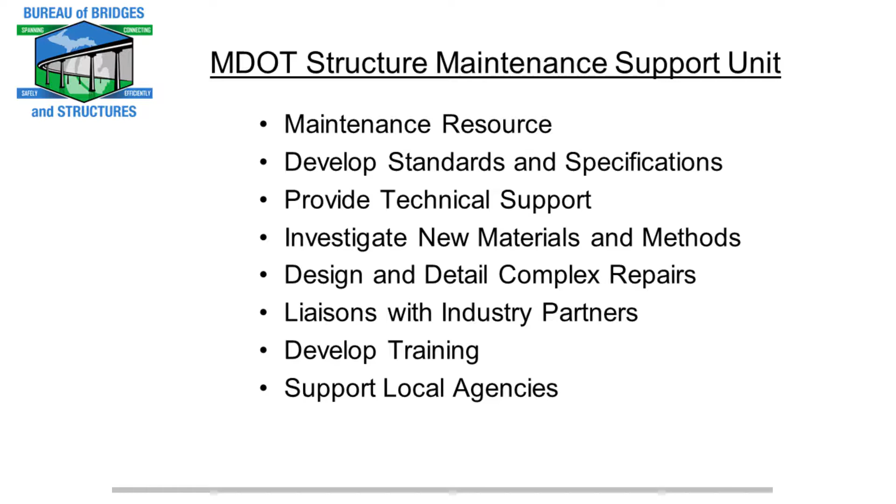The MDOT Structure Maintenance Support Unit that I'm the manager of is the maintenance resource for the entire state, whether you're a regional partner in Michigan DOT or a local agency, county, city, village, anyone. We help develop standards and specifications for bridge preservation projects, provide technical support, investigate new materials and methods for bridge preservation, and design and detail complex maintenance repairs. We're also the liaison for the state for all our industry partners for bridge preservation, and we develop training modules for the state and support local agencies with training as well.

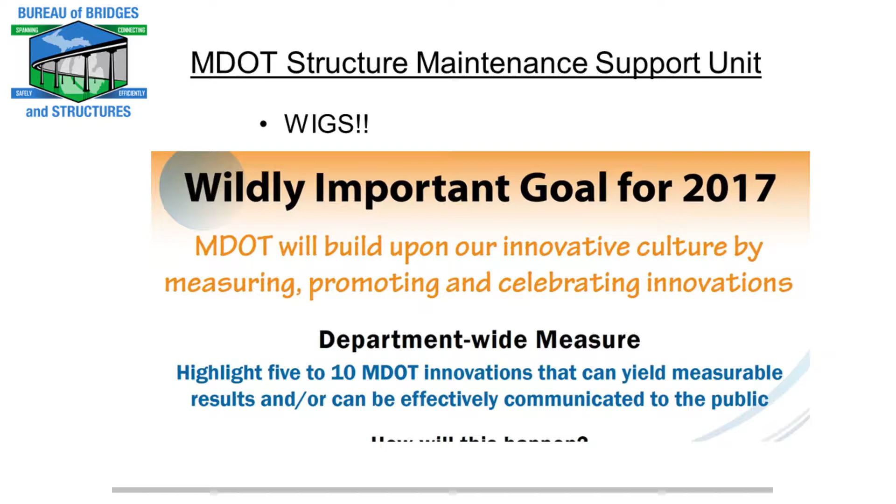We have what's called wildly important goals in Michigan. As an overall state, our wildly important goal was for innovation, but my specific area's wildly important goal for the last 2 years has been to focus more on local agency outreach and help get them up to speed on bridge preservation methods. So we partner with local agencies and we train local agencies.

We also do employee swaps. In the summertime, a local agency in some areas of Michigan can send their workers to work on our bridge crews, and we pay their salary for the summer. Then in the winter, we send some of our bridge crews to their garage to help them plow snow. So that's how we go back and forth. That brings actual hands-on field experience in a very easy way back to the local agencies.

A lot of their challenges is they just see bridge preservation as being something too scary for them to do. They don't even want to touch it, so I try to get out in the field as much as I can with them to explain the simple things they can do to extend the life of their bridges.

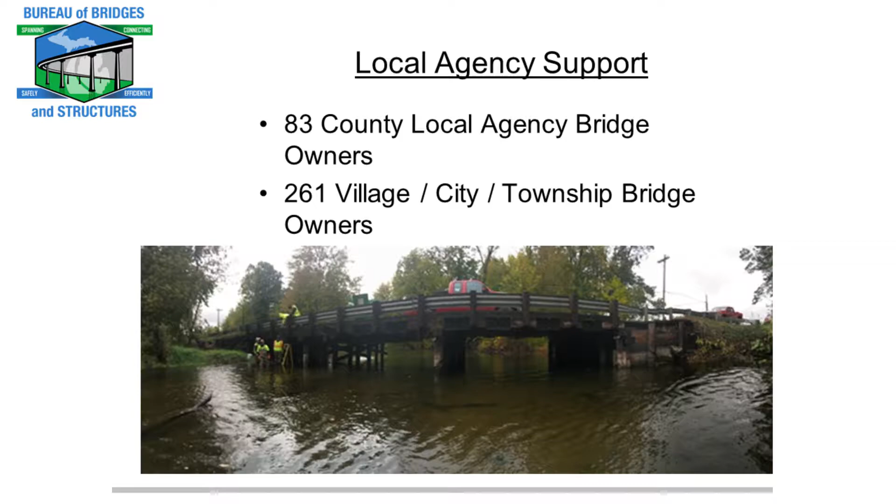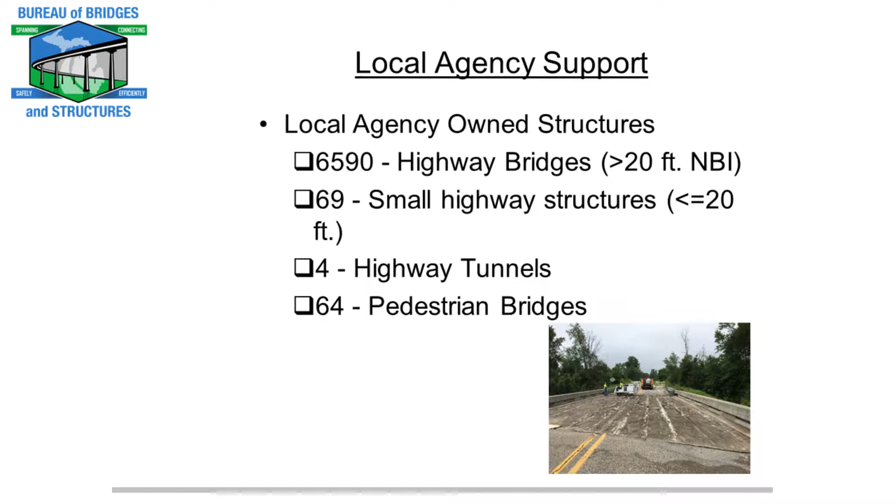Michigan has 83 county local agency bridge owners, and 261 different bridge owners that are village, city, or township local agency owned structures. There's 6,600 highway bridges. Our Constitution says we have to call it a bridge if it goes all the way down to 10 feet, so local agencies have another 69 that are less than 20. They also have highway tunnels and 64 pedestrian bridges.

In Michigan, our Constitution says we have to inspect anything over or carrying road traffic, so pedestrian bridges, railroad bridges, everything has to be inspected by the state or local agencies. Just in comparison, the state of Michigan, MDOT itself, only owns about 6,000 bridges, so we have less than the local agencies.

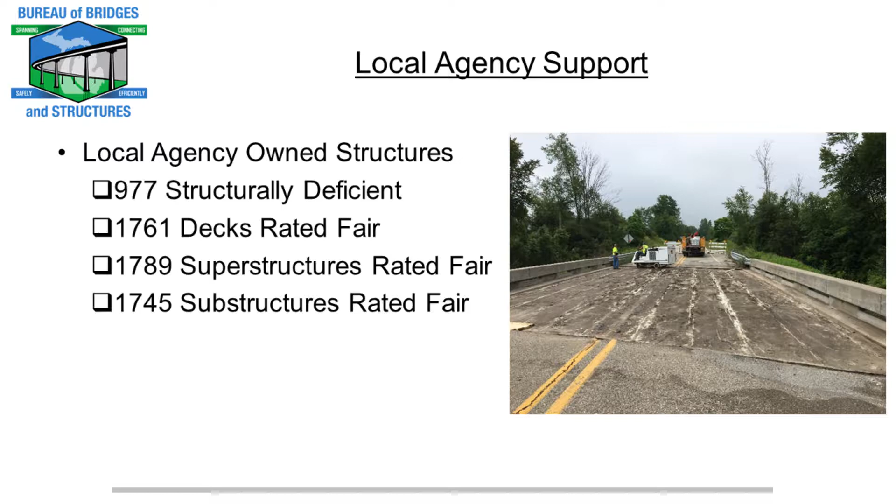Local agency owned structures have 977 that are structurally deficient, and nearly 2,000 with decks rated fair, superstructures rated fair, or substructures rated fair. I want to teach them how to focus on those fair rated bridges to make sure they're not falling into that structurally deficient category.

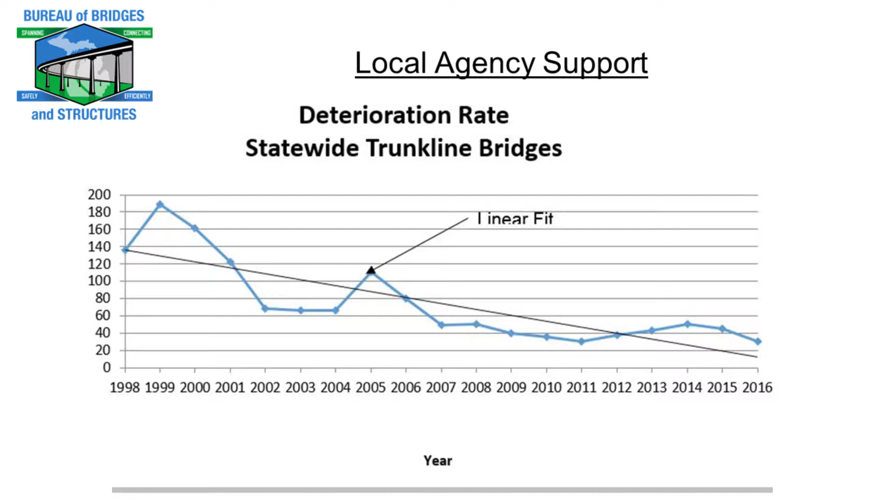Michigan started doing this strategy in 1998. This graph shows that in 1998, Michigan had 140 bridges for the first time fall into the structurally deficient category from either good or fair. We've been able to reduce that trend of how many new bridges fall into our structurally deficient inventory every year since then, down to this graph which goes to 2016, where we had only about 30 bridges fall into the structurally deficient category. That's just from having a very solid bridge preservation strategy.

Prior to 1998, we were a worst first state and didn't do much for maintenance. Every year, as part of this goal, our regional bridge engineers have to explain to upper management how they are going to keep every bridge rated a 5 from falling into the structurally deficient category as one of their focuses.

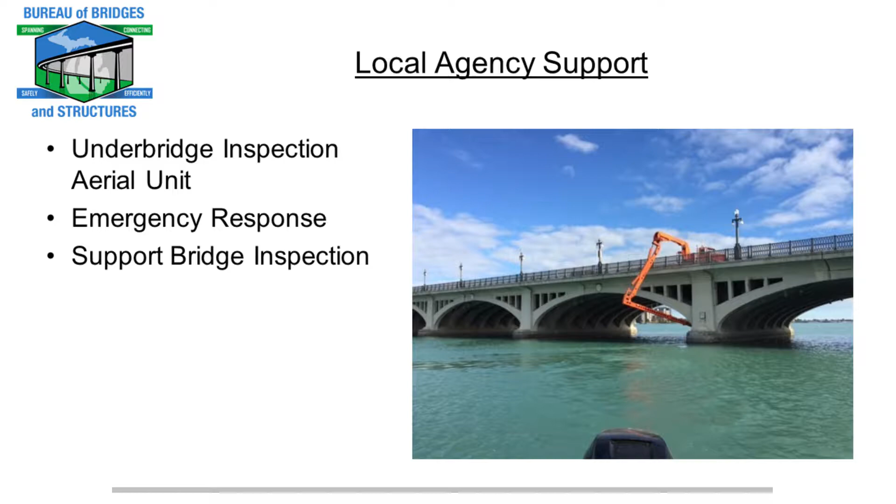We also support our local agencies. We let their inspectors go on our under-bridge inspection unit, we'll help them with emergency response if they have a problem, and we'll support them in bridge inspection. And we don't charge them anything for that.

For local agency training, last year our LTAP put on an annual conference for local agencies to come to, and the topic for 2 days was nothing but bridge inspection, bridge construction, and bridge case studies. Last year they asked me to come in for day one and do 8 hours of presentations on bridge maintenance.

So I got in a room full of probably 250 local agency members, and was able to give them a full day's training on simple things they can do to maintain their bridges, how to do joints, how to clean joints, the benefits of just getting the dirt off your bridge and your bearings, and the benefits of simple preservation activities that if we went out to our local agency bridges, we actually wouldn't see them doing. A lot of them, their sidewalks are covered in dirt and just sit there wet, and the chlorides sit there on the sidewalks all year, and they start to deteriorate, and they don't even realize what that's doing to their bridges.

We'll also help local agencies with scoping. We had a Missaukee County Road Commissioner give me a call. He was in a panic because his consultant inspector lowered his deck rating on one of his bridges from a 6 to a 4, and he thought it was a pretty good bridge. So he was in a panic as to why this was going on and what he could do to make sure it didn't stay structurally deficient, because he really had no idea.

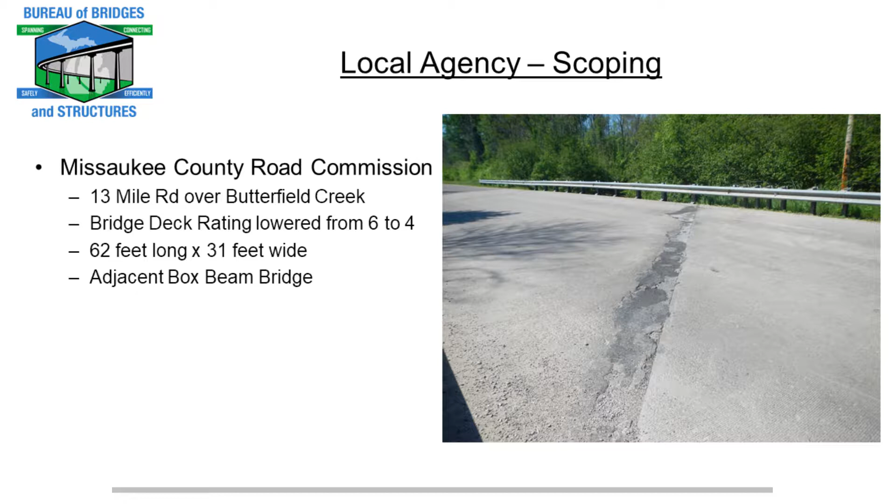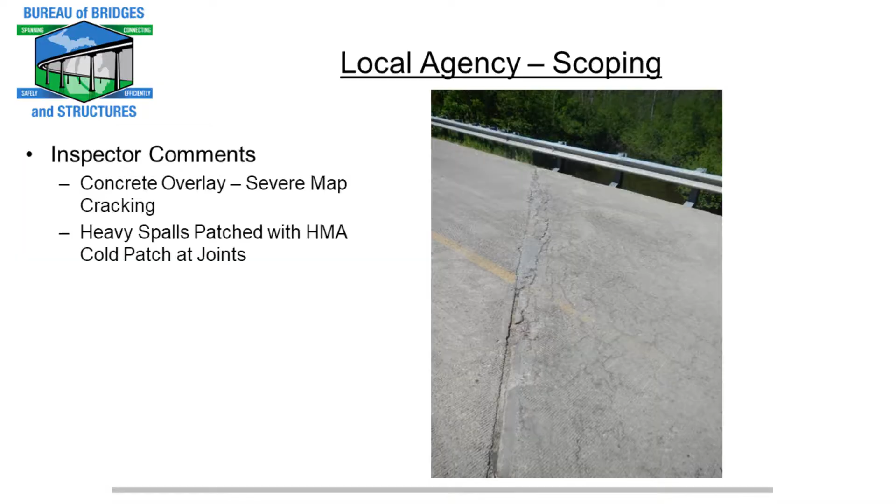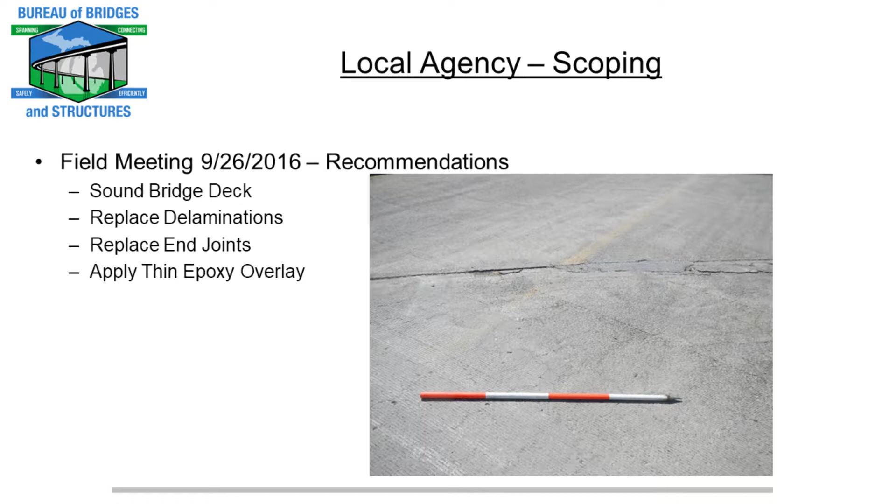So we met him out in the field. It was an adjacent box beam bridge, and the inspector's comments said it had severe map cracking and heavy spalls at both joints. But the bridge was so small that that percentage of the deck warranted probably a 4. So we actually hooked him up with one of our regional bridge crews to help him replace the joints and put a thin epoxy overlay on that bridge deck, and showed him how simple it actually is to repair something like this. That bridge is no longer on their structurally deficient list.

And when I say these people have no idea what they're doing, there's a lot of local agency bridge owners out there - maybe I came across bad. Here's a funny story. Our head inspection engineer for the state actually had to call a local agency. She was an elementary school teacher. Had to pull her out of a classroom and tell her she had a bridge inspection that was late, and she didn't even know she had a bridge. So sometimes that can be your local agency bridge owner. Some of these people really do get into a panic and think bridges are scary.

We also help out with a lot of product trials. This is where I'm going to talk about UHPC a little bit. MDOT's had a lot of challenges with UHPC. The first trial project we tried to do, we specified Lafarge, and the general contractor submitted a value engineering change proposal that completely got rid of the UHPC because it was so expensive, and MDOT actually accepted it even though we wanted to try it. I'm not too familiar with why we accepted the value engineering change proposal. So our first trial project in Michigan for UHPC, we actually didn't use it.

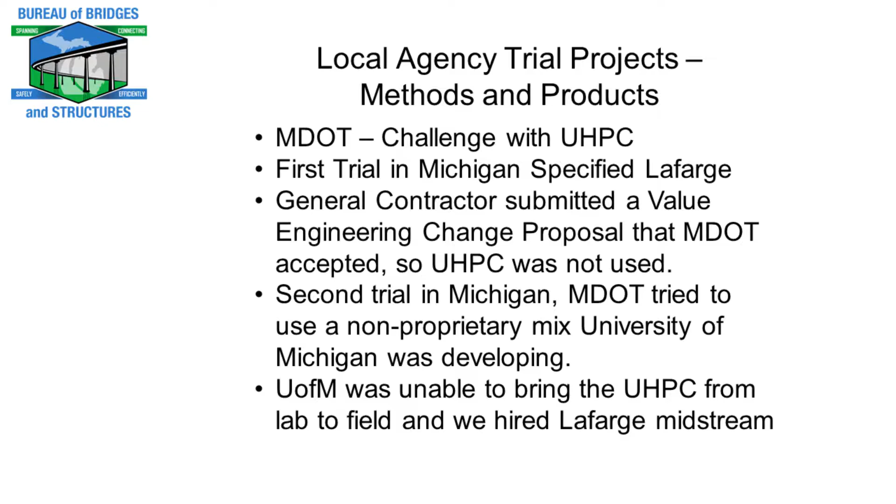We didn't use it until our second trial. We tried to use a non-proprietary mix developed by the University of Michigan for research, but at the time of the project, they were unable to get their laboratory batch size upscaled to a practical field batch size. So midstream in the project, we actually hired Lafarge to come out and do the UHPC for us. But within another year, U of M had actually perfected their batching, their sequencing, and their UHPC mix design. This is where we landed on our UHPC mix design, and this one we were able to actually get into a large enough quantity to batch in the field.

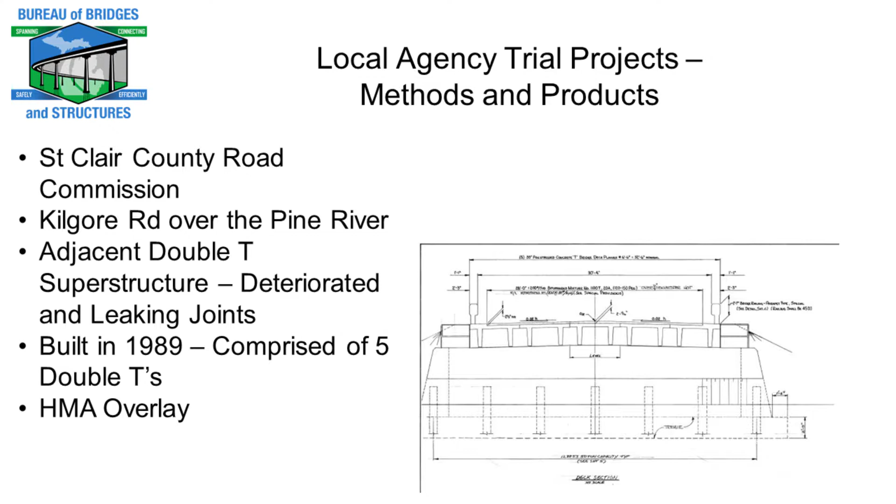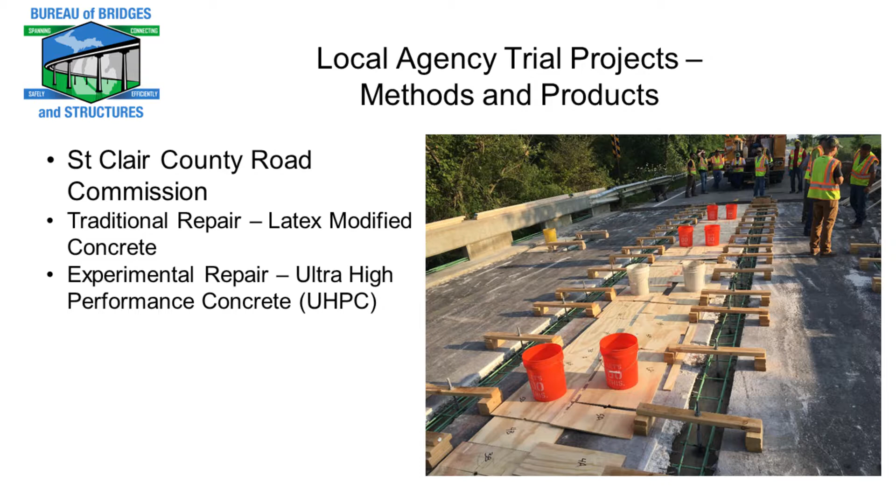A little bit after U of M was able to come up with that UHPC mix design, the St. Clair County Road Commissioner gave us a call and said they had a bridge with an adjacent double T's superstructure where the joints between the double T's had completely deteriorated and leaked, because all they'd ever had on it was an HMA overlay with no membrane. It was built in 1989, and they asked us what we could do to fix this - could we give them a hand? In Michigan, a traditional fix for that would be a latex modified concrete, but we thought this would be a great opportunity to try the mix that U of M had developed and said they could get to batch in the field. So we went forward with using U of M's ultra-high performance concrete mix design for this project.

We also took advantage of the fact that these were all non-proprietary materials that could easily be bought on the open market. We used this situation so that when we were done with U of M's first mix design, they wanted to actually field batch trial several other mix designs.

So now we have more than one that we can evaluate. This is just another picture of the bridge. It's a typical DOT experiment though - there's actually more DOT employees there than can fit on the bridge.

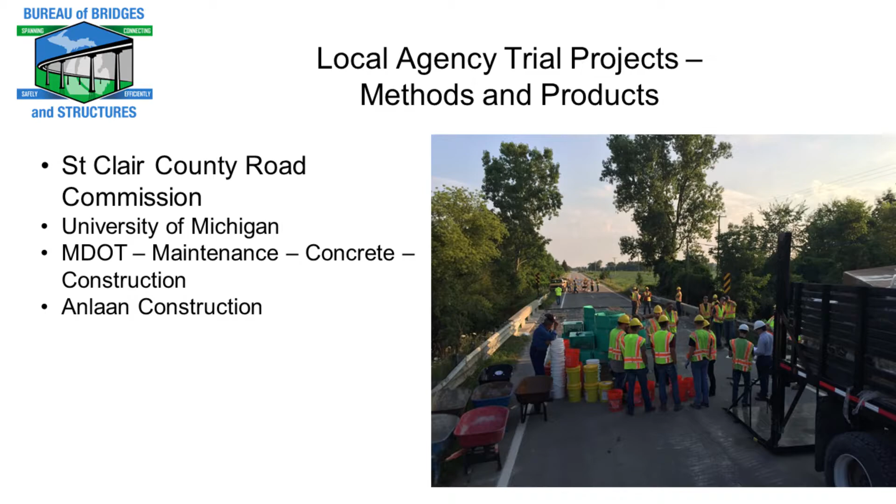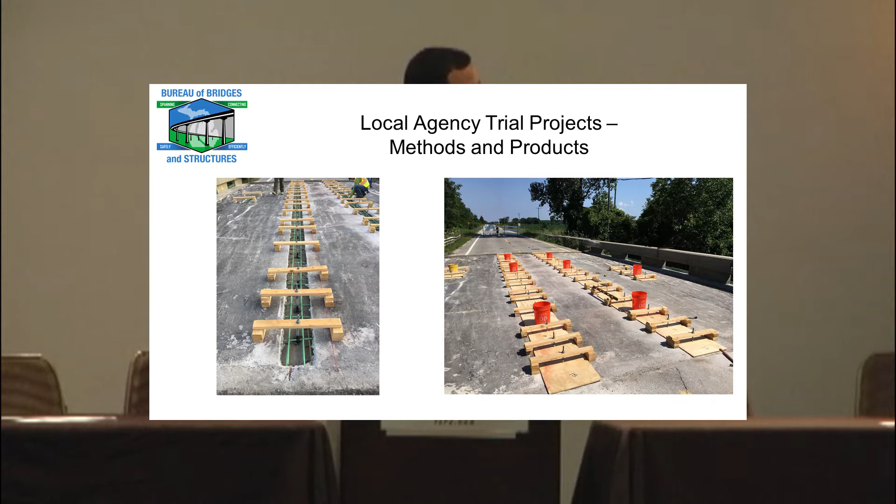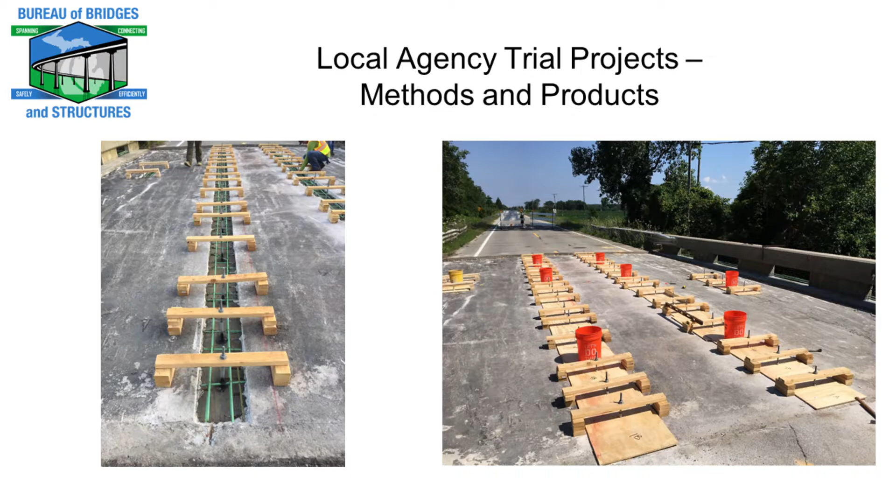For this UHPC trial, UofM wanted us to do a full depth pour. These bolts here are supporting the forms underneath the T-beams. Over here, these are clamped down to the ground and to the deck. These will be clamped down to the deck after the UHPC is poured, and then we filled these buckets with UHPC to give a bit of a pressure head and try to squeeze it into as many of the crevices as we could.

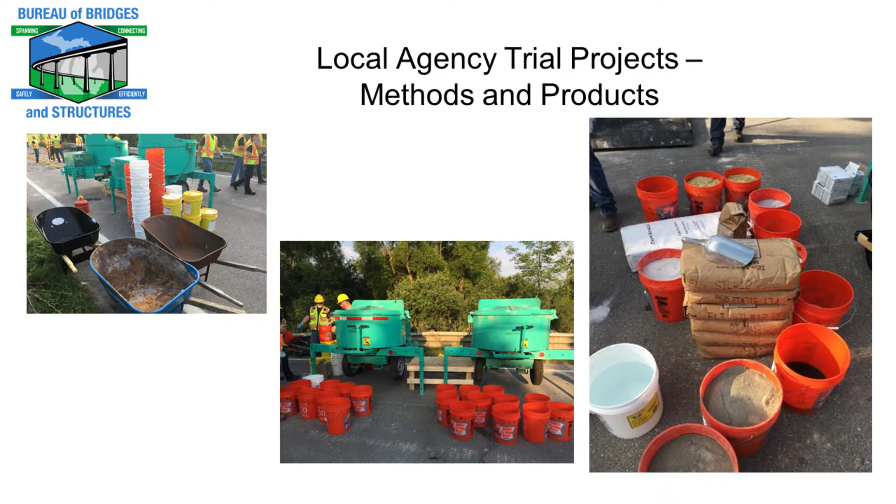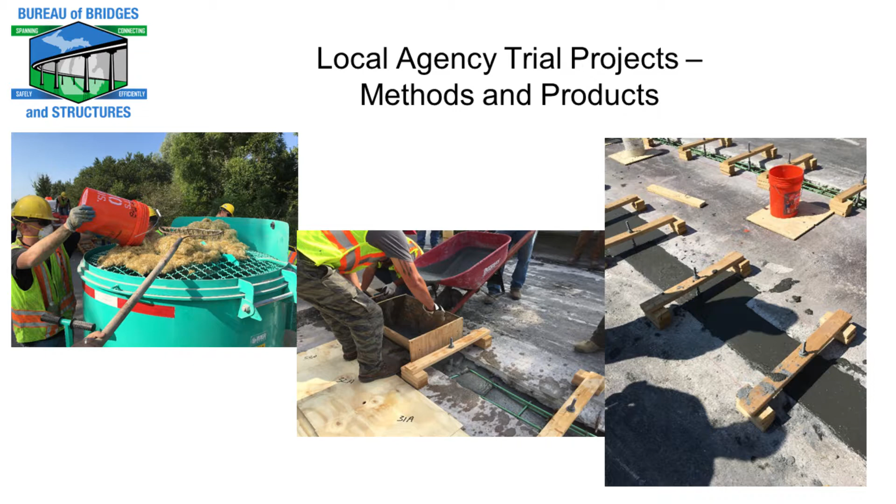You can see here it took an army of co-ops, buckets, wheelbarrows, and measuring devices. It felt like a big chemistry project out there, and the co-ops were loving it because it's just like the labs they have in college. Here we are just dumping in and batching things. The St. Clair County Road Commission built this little bucket to help transfer the concrete from the wheelbarrow into the slot without spilling too much.

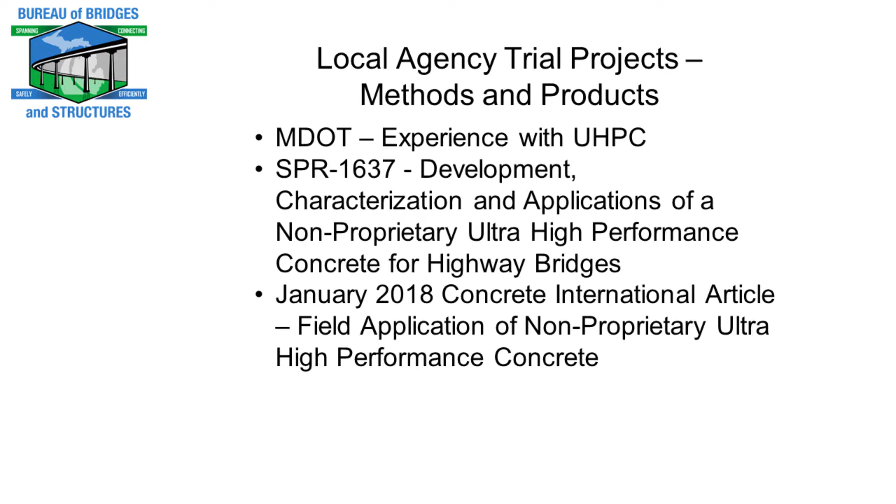So our experience with UHPC - the whole project went really well. I didn't get real technical in this presentation, but you can read all about the UHPC mix design UofM came up with on our website. It's SPR 1637, and if you want to Google it, the whole entire project we did with St. Clair County is in the January 2018 Concrete International magazine. UofM wrote an article for that.

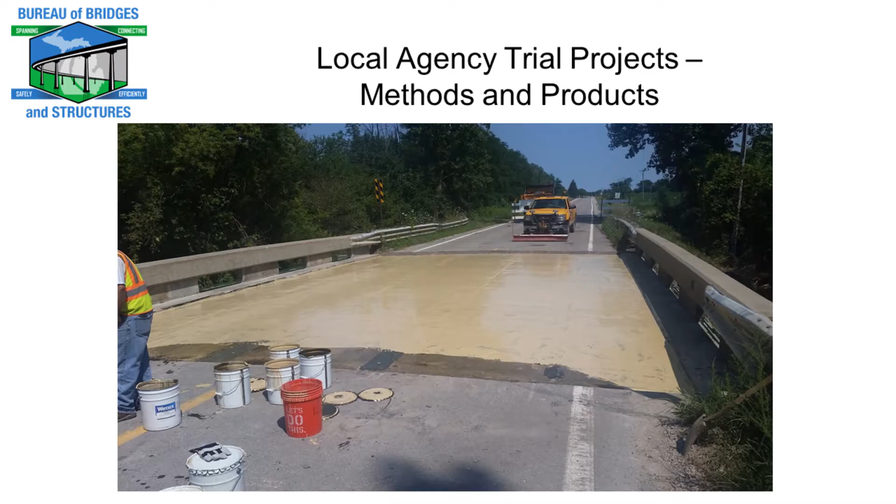As I said before, we also do lots of trial projects for these local agencies. Not to let a good opportunity go to waste, we decided at this same bridge we did the UHPC on, before they put back an HMA overlay, we wanted to trial a spray applied membrane. So we rolled two actual trial projects into this one project.

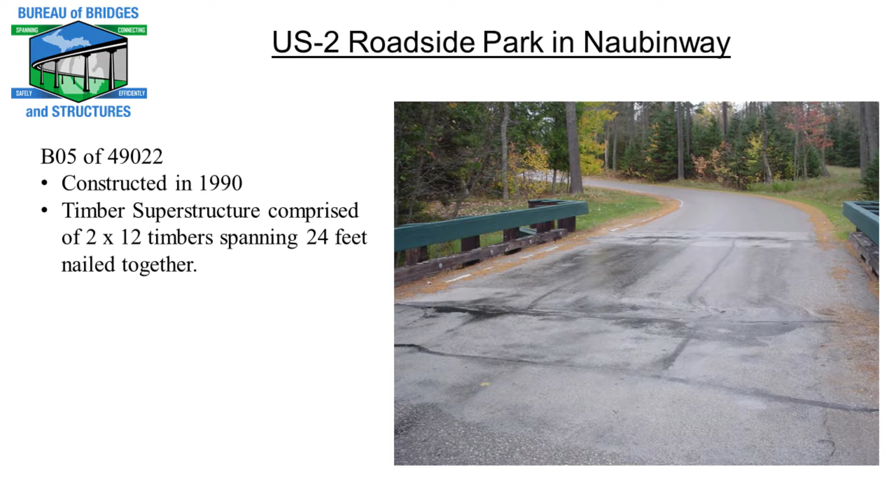But this is what they start to look like after a couple of years. The wood and moisture expanding and contracting backs out all the nails, and these bridges start to grow. In 2011, one of our inspectors was out inspecting the bridge. A truck drove over it, and he had an 'oh my God' moment as he saw how much the bridge deflected. He decided to do a load test on it, and this is when we discovered it was actually deflecting quite a bit.

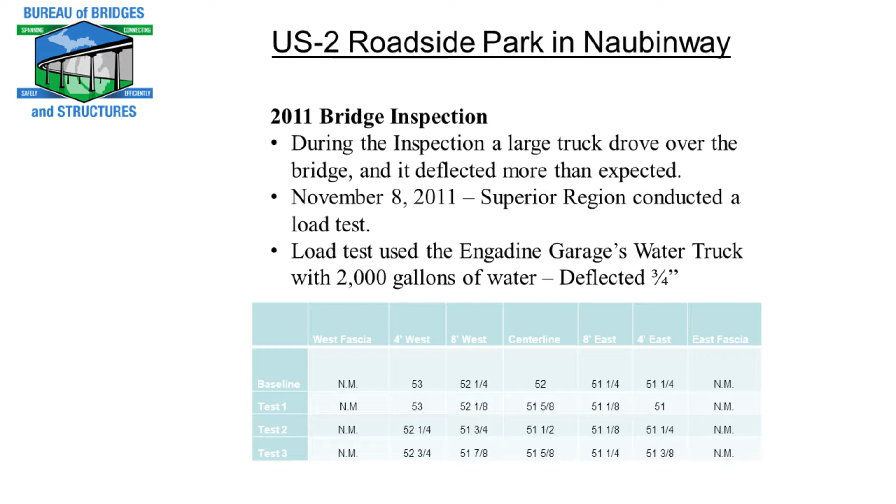It's only a 20-foot span, I believe, or 24-foot span, and it deflected 3/4 of an inch. That was just with a 2,000-gallon water truck sitting on it. And this bridge is going to be seeing lots of logging trucks in the UP, completely loaded as high as they can stack it.

So how do you fix this? I'm not going to tell you - that's my next presentation today. It was just my teaser.

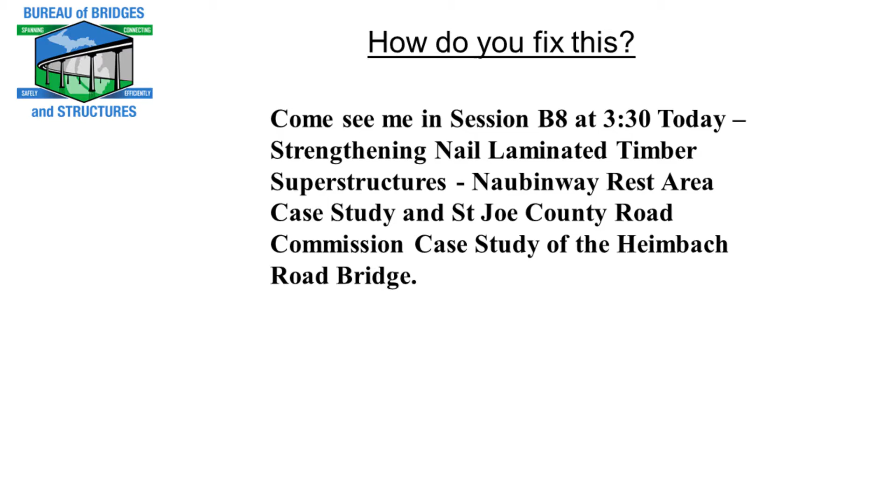Michigan only has one nail laminated timber superstructure that MDOT owns, but our local agencies have hundreds of these. So at our LTAP conference, I gave a presentation on this, and at the next presentation I give, you'll see how we fix this and how, since that LTAP conference, local agencies have been engaging me to fix their bridges with similar problems. They have hundreds of these in their inventory because they're real cheap and real small.

Quite impressive that you guys do so much work directly with the locals - in fact, you even have your employees work with them.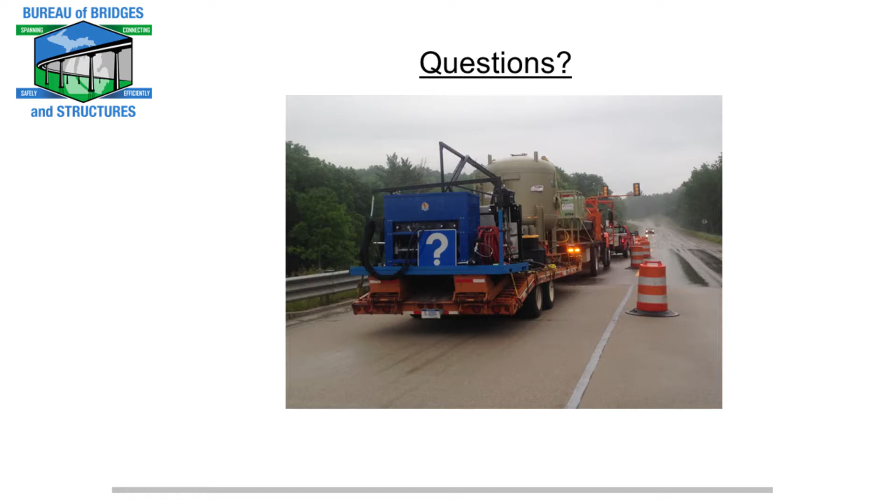In Oregon, we've done some of that, but it's only when they can do overtime kind of a thing, and then they'll go do a small project. Did you guys actually go to the legislature and get some additional positions with the promise that you'd do more support to local agencies? No, the legislature doesn't even know that I do this.

This is being recorded, I know. Well, they're not going to watch it, so we don't worry about it.

On your state inventory, are you guys caught up enough so you don't have a real challenge pulling them off of state projects to help? Our state has 7 regions, each with probably 1 to 2 bridge crews, and they're only 4-person crews, sometimes 5-person crews. So they can't do a lot, but we do try to help local agencies when we can. We're not doing it a lot.

A lot of the help we give them is just my unit going out and guiding them through the process, and guiding them through what's going on with their bridge.

One thing that didn't make my presentation recently: they called me out to the bridge and said, hey, we have this distress on this adjacent box beam bridge, we don't know what's going on, the bridge is only 20 years old. And I said, have you guys heard of ASR? They said no, so I explained it to them. MDOT sent out our geologist to their bridge, took samples, and discovered the bridge was suffering from severe ASR. Through that interaction, they were able to secure funding to get that bridge replaced, even though it was only 20 years old.